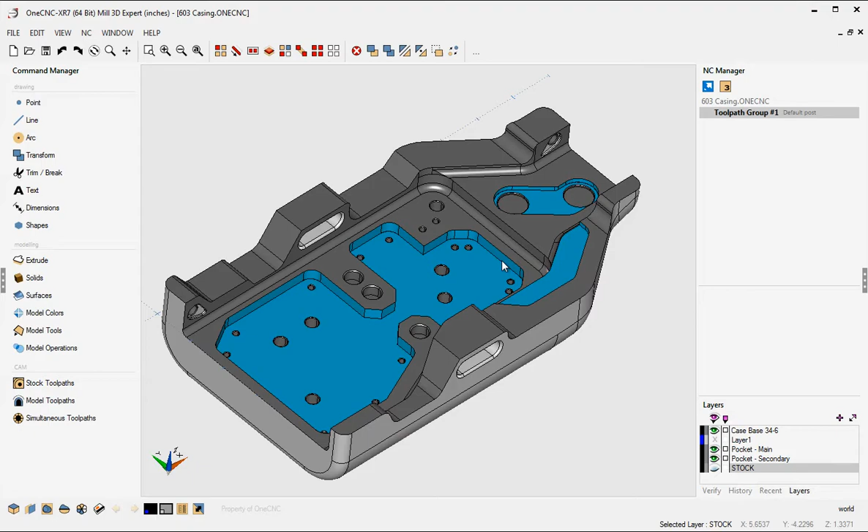This is Patrick at OneCNC West, and what we're going to do in this video is continue to take a look at the OneCNC Active Cut technology and how it applies to OneCNC XR7. So let's take a look again at performing a high-speed pocket operation here. In fact, what I want to do is this.

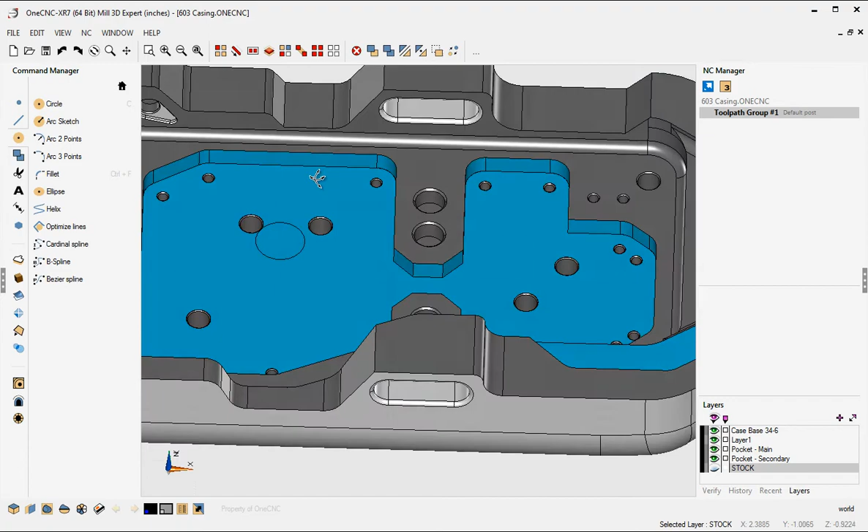Let's change the view to a top view, and let's say I want to drill a hole right here, and I want OneCNC to use that hole location to start this pocket. Well, that's very easily accomplished now within XR7. In fact, I'm going to make an arc, and I'm just going to digitize it right there. Okay, so there's my arc, and what I'm going to do is just simply drill that.

So let's just use drill single. We'll use arc center, grab the center of that arc, and I'm going to use a .625 drill. I'm using a flat bottom drill. You don't have to do that. You can use a standard drill if you want to, 118 if you want. It's up to you. And there's our depth at minus 0.25.

I'm going to use a canned cycle. I'll just use a G83 peck, 150 thousandths for my peck depth. So there's the hole that's been drilled. Now let's head over here to our pocketing. Let's select the pocket. That looks good.

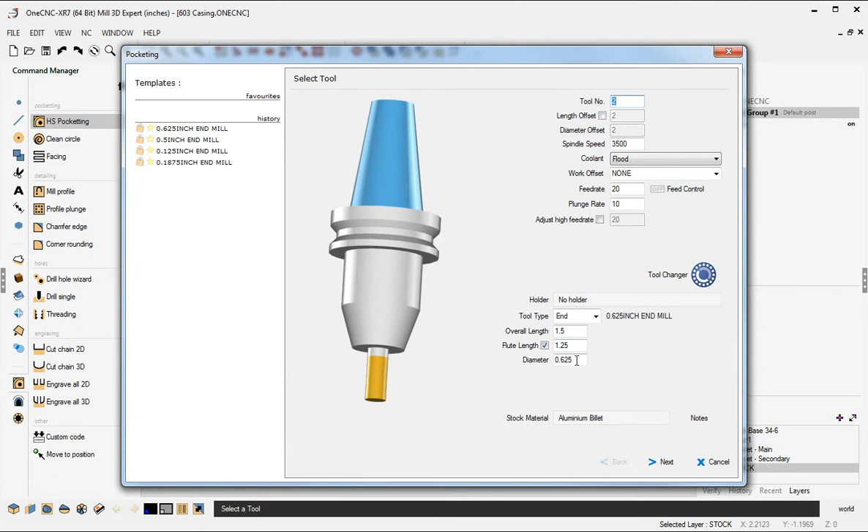So I'm going to be using a .625 diameter end mill. And there's our depth of cut there. We're going to use high-speed closed for that. And notice now that you have an option up here to choose between plunge or ramp helix. I'm going to use plunge because we're going to be plunging into the hole that I drilled.

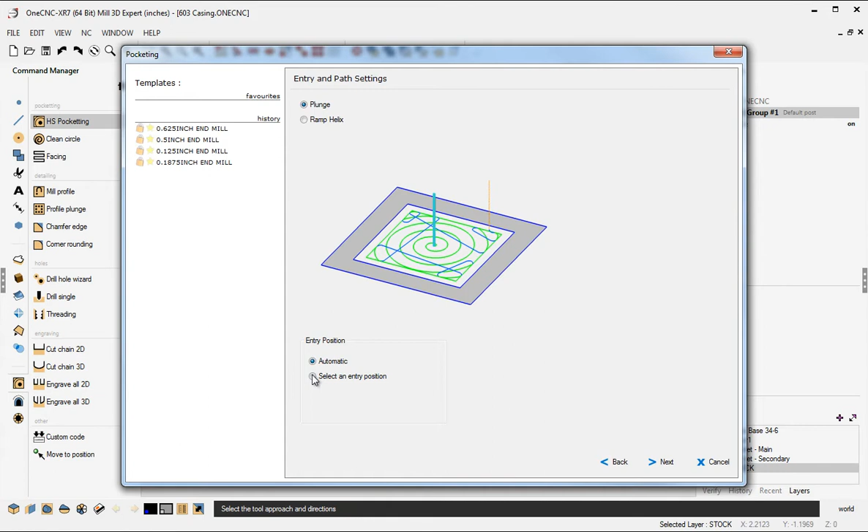And down here, instead of automatic, automatic is where OneCNC figures out where it's going to start, I'm going to use select an entry position. So we'll click next. I'm just going to leave these parameters the same. And now it's asking to digitize that circle. So I'm going to left click there and then right hand mouse click.

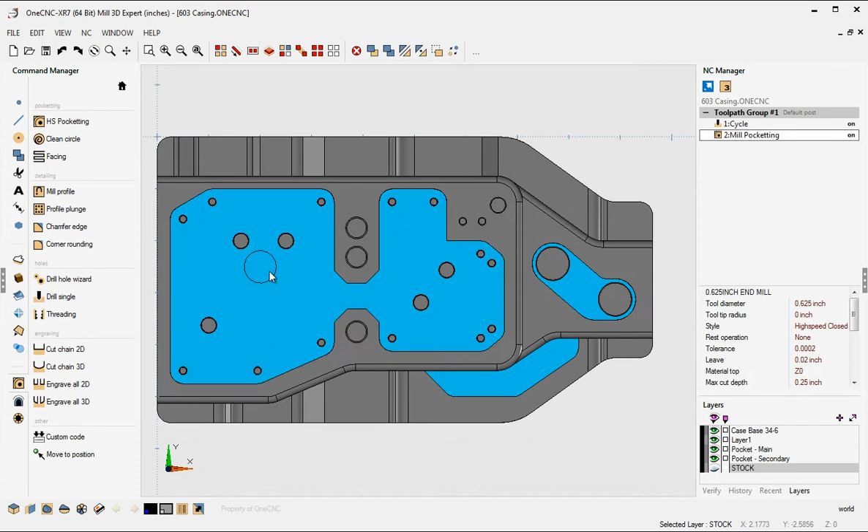And there you go. In fact, let's go to a top view. And let's go back here. You can see now that that toolpath has started exactly at that location. Now what's very interesting about this, and I think also very versatile as well, is that in this pocket, the tool was too big to get through here. So it started here and then it came over here.

Well, if you want to, you can apply multiple start locations. So let's come over here. Let's put another circle there. Let's edit the drilling operation. That looks good. That looks fine. So now it's drilling both those holes.

And let's also edit our pocket operation here. High speed, we're going to select the entry position. I suppose I could have just used repick path on that, but I'm going to grab both those circles there. And now you can see that the toolpath has started exactly at both those hole locations, for each side. So you can have multiple start points on a single pocket, or you can have multiple pockets all with their own individual start points.

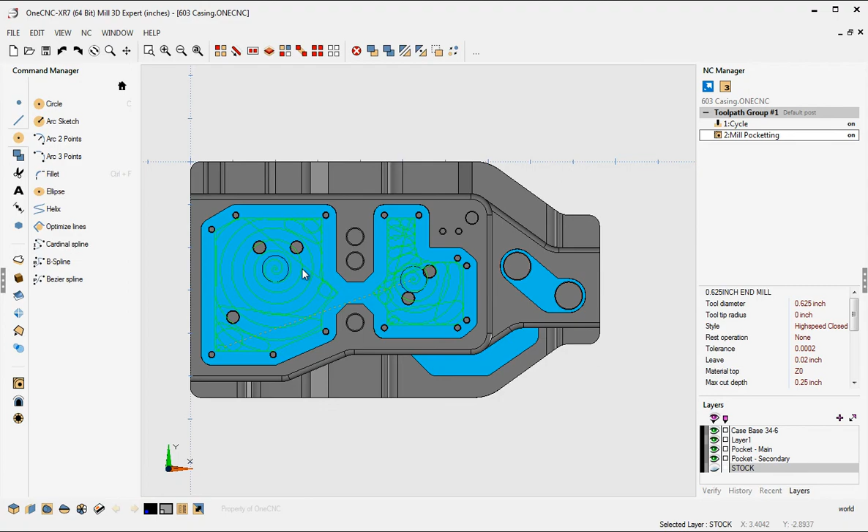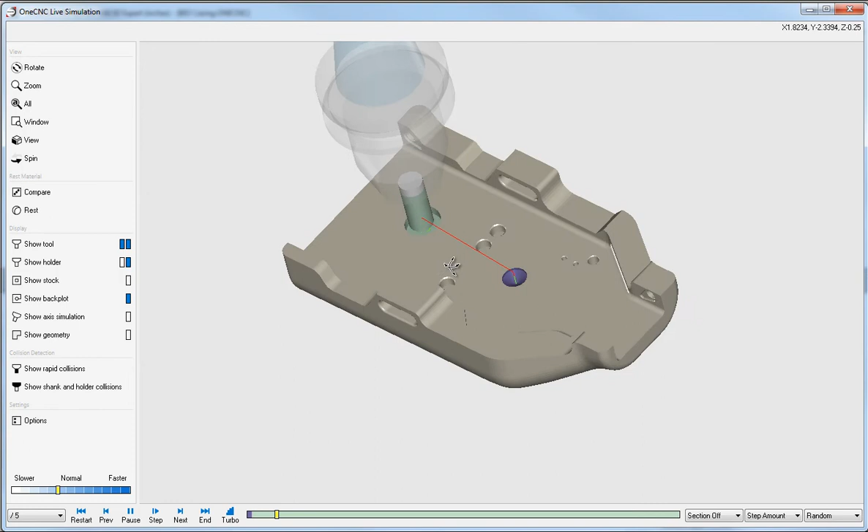I think it's a very, very versatile enhancement that's been added to OneCNC XR7 and is the direct result of the OneCNC Active Cut technology. Why don't we finish this up with just a quick simulate. So we'll go to simulate. I would probably use a flat bottom drill to drill this, but I'm just using a standard drill there. You can see that OneCNC has taken the tool and it's entered into the pocket using that pre-drilled hole location.

Let's speed this up a little bit and you're going to see the same thing happen over on the other side there. Okay, so here's our finished passes. There we go. Tool comes up, rapids over, and feeds down into that hole location.